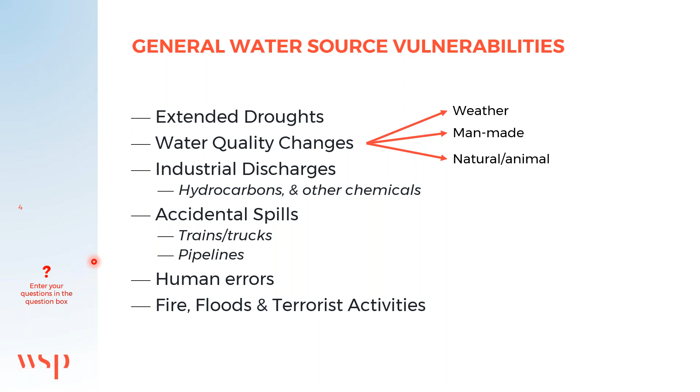Whether the water source is a lake, river, or well water, there are many vulnerabilities in any given water source. These vulnerabilities include extended droughts, sudden water quality changes due to weather, man-made reasons, or natural animal reasons, industrial discharges such as hydrocarbons and other chemicals, accidental spills including train derailment, truck accidents resulting in various compounds released into the water source, pipeline ruptures, human errors, fire, floods, and terrorist activities.

Let's take a look at a couple of past incidents. The first incident we are talking about today happened in 2016 in the city of Prince Albert in the province of Saskatchewan, Canada. They were serving a population of about 36,000 people. Water for this community is taken from the Saskatchewan River. In July that year, approximately 200 to 250,000 liters of heavy oil and diluent was accidentally released into the river. When the spill was detected, based on the river water velocity, it was estimated that oily water would reach the water intake in about 4 days.

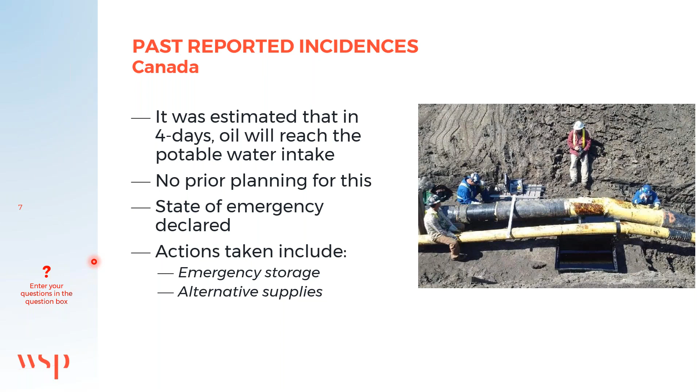Like many communities, Prince Albert had no planning for an incident like this. As a result, a state of emergency was declared to deal with the situation. Very quick actions had to be taken to provide emergency water storage and supply water from a number of alternative sources.

The second incident we are going to talk about is the 1993 Milwaukee, Wisconsin outbreak. This is one of the most documented waterborne disease outbreaks in the United States. This particular water system serves about 800,000 people. The source for this water supply system is Lake Michigan. There are 2 lake intakes. In March 1993, about 400,000 people got infected with diarrheal infections as a result of waterborne contamination. Among many reasons, one of the key findings of the investigation is that the high turbidity spikes that occurred in the intake due to heavy rain events were responsible for this incident.

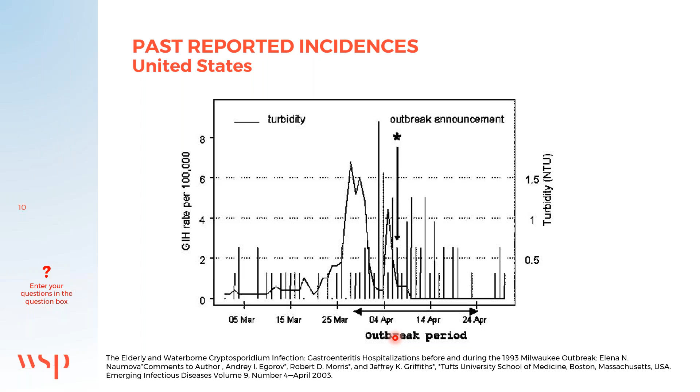And the case study we are going to look at later on today is actually related to something similar, potential turbidity spikes occurring in intakes, and what are some of the solutions for that.

The above incidents and many other reported incidents clearly indicate that there's a need to have a source water resiliency plan in place for any given community. Even though many of these incidents cannot be predicted, there's quite a bit of planning and preparation that can be done to face this type of incident when it happens.

Let's look at the key planning tools available for any community, which include waterworks emergency plans, drinking water safety plans, climate change adaptation plans, and source water resiliency planning. Depending on your location and the regulatory environment, some of these plans may be mandatory. For example, in the province I live in, the Waterworks Emergency Response Plan and the Drinking Water Safety Plan are mandatory.

At this point, I want to give you the differences in focus in each of these planning tools. For example, for Waterworks Emergency Response Plans, the main focus is to face major emergencies. They generally go beyond the waterworks and cover the entire community, and how to get back to normalcy as quickly as possible. So the focus is just facing those major emergencies.

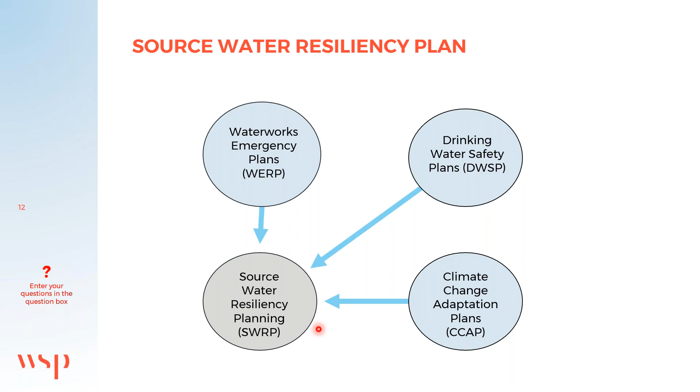So source water resiliency can be defined as the ability of a source water system exposed to hazards to resist, absorb, accommodate, and recover from the effects of hazard in a timely and efficient manner. And that will be the focus of the source water resiliency planning.

Let's look at key planning considerations in developing a source water resiliency plan. First of all, establishing a vision and identifying stakeholders for the particular community. Every community has unique characteristics with respect to the stakeholders, and also what you want to make sure of in an incident and also before an incident happens.

And characterizing the source and watershed. There's a misconception that we know our watershed, but if you really look closely at the watershed, you may find so many vulnerabilities that we have not seen before. And through that characterization, identify hazards, and then assess and prioritize risk.

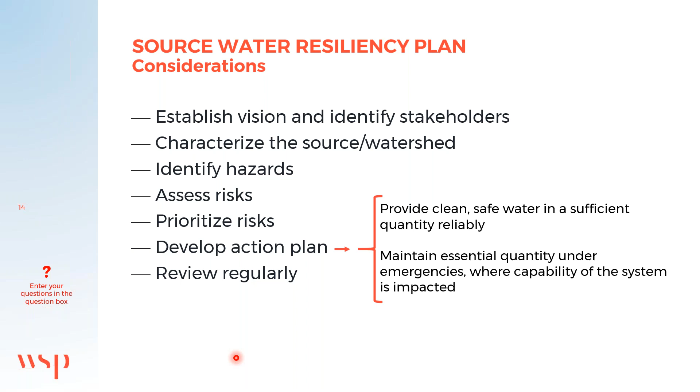Anybody who has been involved with any planning exercise would know about assessing and prioritizing risks with respect to identifying the probability and estimating the consequences and coming up with the risk score so that you can prioritize which risks are the highest. After that, we can develop an action plan with the objective of both providing clean and safe water in a sufficient quantity under normal conditions, and also maintaining essential quantity under emergencies where capability of the system is impacted. Like any other plan, regular review of the plan is also required.

As I indicated earlier, watershed characterization and identification of all potential hazards is a very important aspect of the planning process. Contaminant sources may include the human footprint, just the density of the population and sewer discharges, for example, and other municipal, agricultural, and industrial discharges, and transportation activities and pipelines.

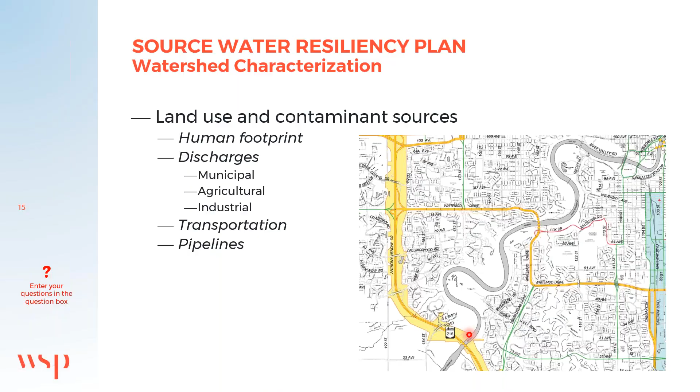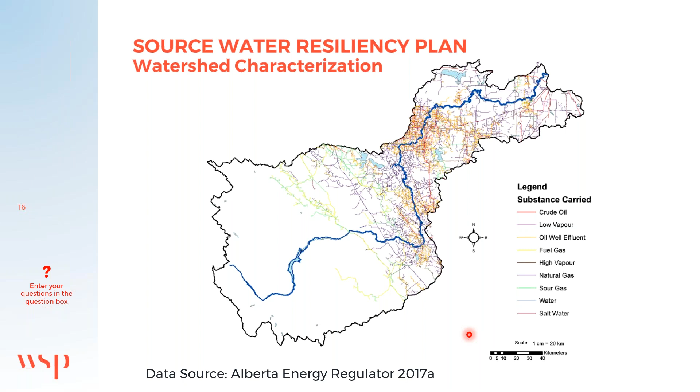Continuing on the watershed characterization, this figure shows all the pipelines within my watershed, where all these different materials like crude oil, fuel gas, natural gas, sour gas, and every other component are being transported. One good thing about this digital age is that this information is readily available from websites of your regulatory agencies and other interest groups.

It is important to consider these possible accidents, and when and if these incidents happen, what type of contaminant you are expecting at the intake, and what level of concentration will be expected at the water treatment plant. Can the existing treatment handle this type of contamination? What enhancements can be done to improve the treatment during this type of contamination? And do we need to bring in some standalone systems or portable systems?

Also, as part of the planning process, it is quite important to do bench scale and pilot tests to simulate or mimic the accident situations and see how the treatment plant will respond. Alternative water supply evaluation: in case the water supply is compromised, what other sources are available nearby so that we can get water during an emergency? And again, considering upstream monitoring so that you can get some early warning is a very important aspect of the planning process.

Once we have an idea about possible hazards that can happen, several planning investigations can be done, including intake protection options evaluation and emergency storage options evaluation. What are the emergency needs? In an emergency, you may not need the full amount of water that you generally supply. What are the critical needs of the community, and who gets the priority and how much? Those are very important questions to answer during the planning process.

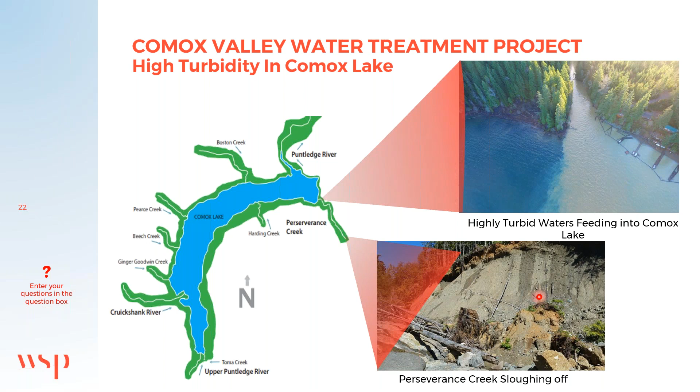Historically, occasional high turbidity spikes have been observed in the raw water, particularly in 2014 and 2015. These spikes were partly a result of erosion, as you can see in the picture below, in some of the tributaries feeding the lake, especially during heavy rain events. As a consequence, frequent boil water notices were issued, impacting the population and businesses.

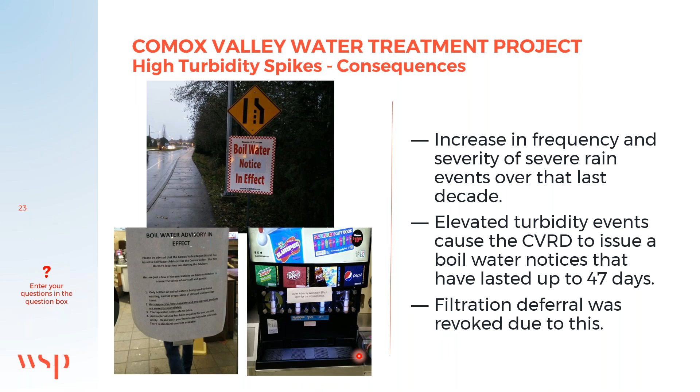As per the provincial regulations, because of the historically low turbidity of Comox Lake, there was an exemption from the filtration requirement. However, due to these high turbidity spikes, regulators revoked the filtration exemption, and they were asked to provide filtration to deal with these turbidity spikes. For example, in 2015, boil water advisories were issued on 47 days as a result of these high turbidity spikes.

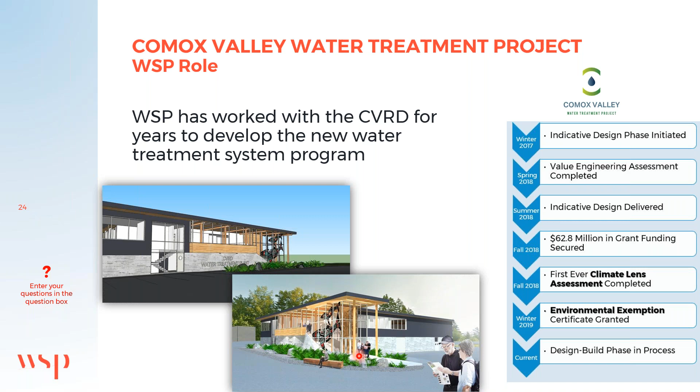WSP has been working with the Comox Valley Regional District for a number of years in planning, design, and implementation of a robust water treatment program, including addressing turbidity spikes and resiliency. Long-term solutions to provide a resilient water system included a new deep water intake in Comox Lake, a new raw water pump station, a new direct filtration plant with chlorine and UV disinfection, and a new transmission main connected to the existing system.

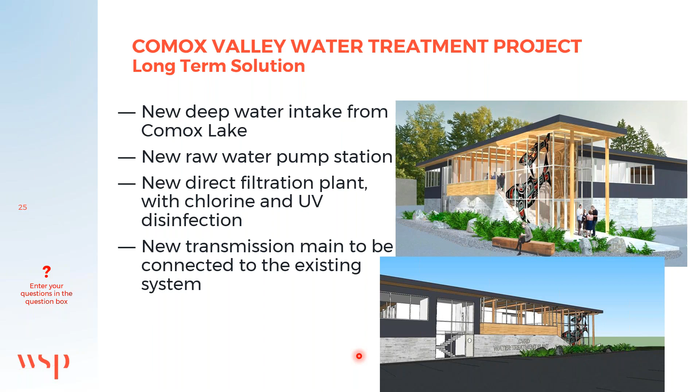As you can see in this map, to get an idea of the relative locations of the facilities, this is the deep water intake, then the marine pipeline bringing the water into the intake pump station, then pumping the raw water to the treatment facility, and then the new transmission main connecting to the existing distribution system.

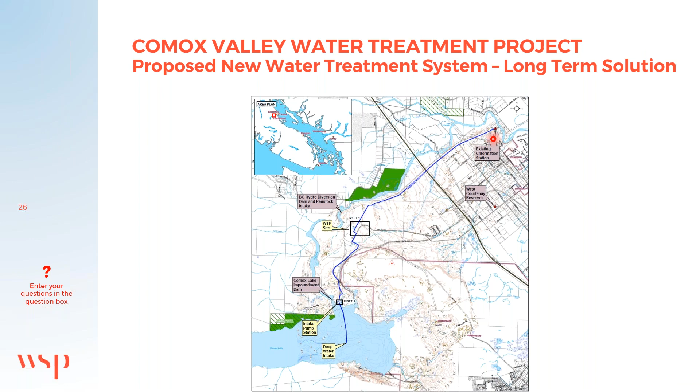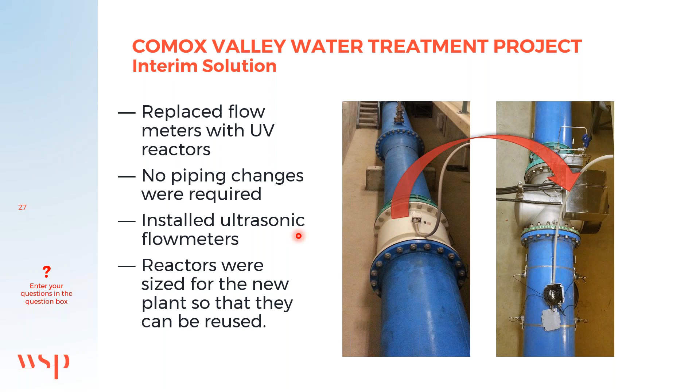While the long-term solution was being implemented, a number of interim solutions were implemented, including installation of a temporary UV disinfection system. This was done by simply replacing the existing magnetic flow meter with the new UV unit. Instead of the magnetic flow meter, ultrasonic flow meters were installed to measure the flow rate. This UV system was also designed so it can be relocated and reused in the new water treatment plant. So this was a quick interim solution that significantly improved the resiliency of the intake system.

In addition, operating conditions were also changed as an interim solution. For example, if the turbidity of the water is less than 1 NTU, a calculated UV dose was provided to meet the disinfection targets. However, if the turbidity is greater than 1 NTU and less than 3 NTU, the UV system was operated at 100% power. Recall that this system is designed for future requirements, so it provides significantly more UV disinfection than normally required. And if the turbidity goes higher than 3 NTU, boil water notices are issued while the UV system is in full operation.

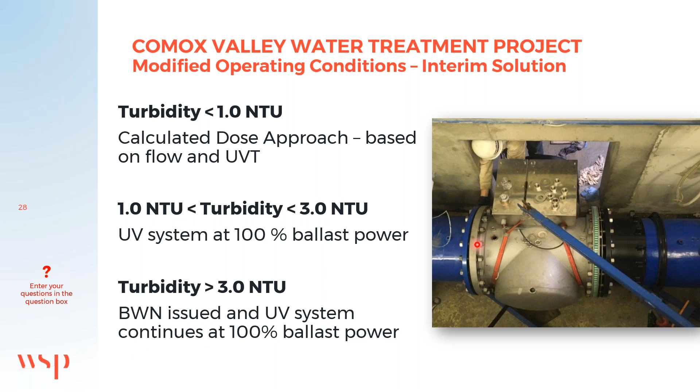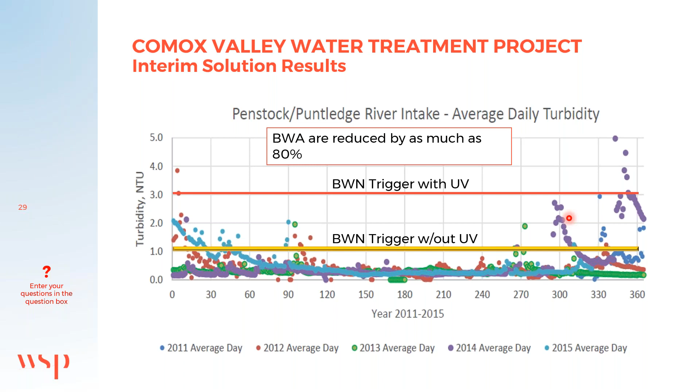By implementing these interim solutions, the plant was able to reduce boil water notices by 80%. As you can see here, without the interim UV solution, boil water notices would have been issued at above 1 NTU, for all these points. However, with the UV implementation and working with the regulators, we were able to increase the trigger level to 3 NTU, thereby avoiding about 80% of the boil water notices that otherwise would have been issued.

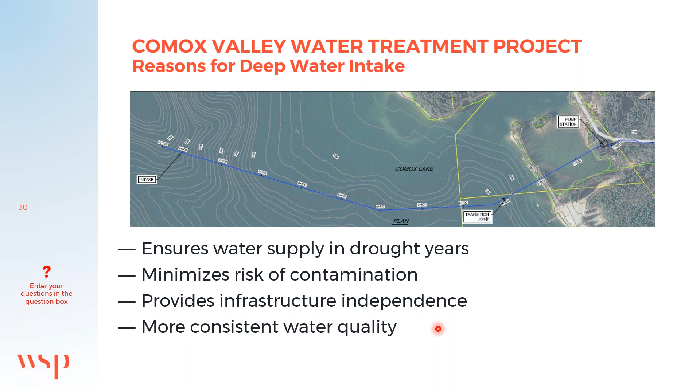One of the long-term solutions was to provide a deep water intake, which is not subjected to the high turbidity spikes that we observed before. And there were a number of other advantages of that intake, including more resiliency during drought years, minimizing potential other contamination, providing infrastructure independence, and overall providing more consistent water quality.

This figure shows a profile of the deep water intake line. You can see the water intake line is here, and then the marine pipeline crossing the existing lagoon to get the water into the intake pump station.

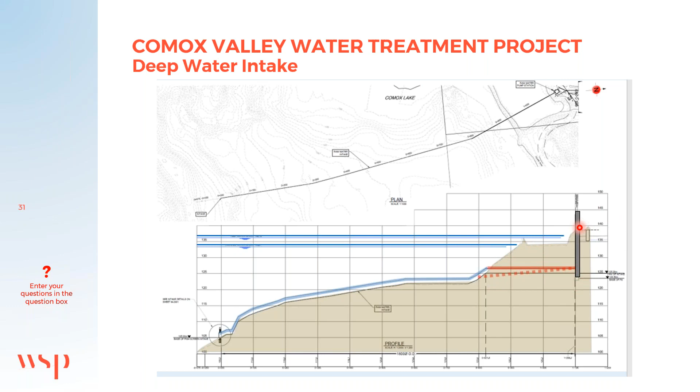Let's look at the summary. So it is important to know your watershed, and possible point sources and non-point sources, hazards and pollutions, and possible accidents, and what emergency quantities you need for your particular community. What are the alternative sources available when your normal source is not available, and what source monitoring, predictions and modeling, for example, and early warning can be installed to get an early warning for possible accidents and other spikes. And what are the alternate treatment options during an emergency and alternate operation procedures.

In general, have a plan, have a source water resiliency plan in place. And this must be in place before an incident occurs. Based on our first-hand experience, it is very expensive and difficult to respond to something like this if you didn't have a plan in place before. And also, not only a plan in place, but also training for all the staff involved is essential. And also having these plans reviewed regularly is also critical for the long-term success.